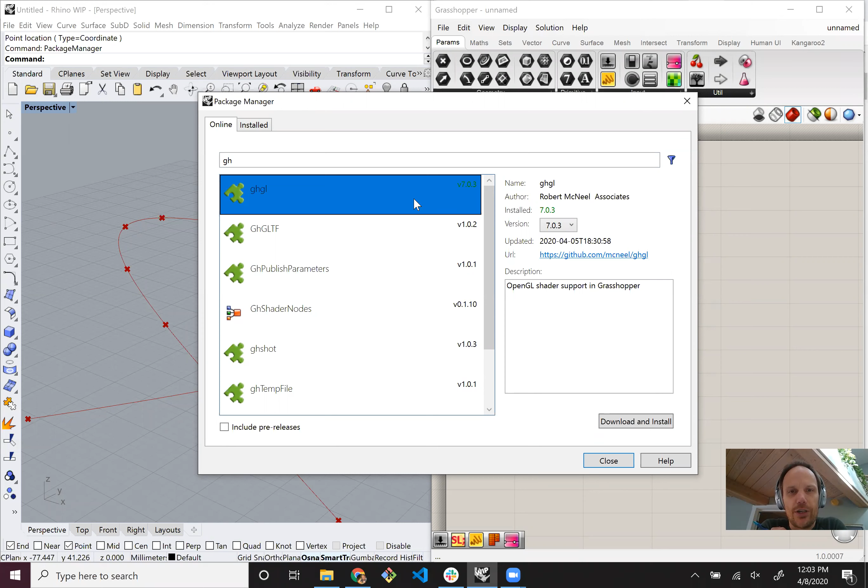I just wanted to point out, so again, we'll start out. GHGL is a component that's available through the package manager. If you're using Rhino 7, I would install the latest version, 7.0.3. If you're using Rhino 6, I believe 0.6.4 was the last version that really worked in Rhino 6, and there's still quite a few bugs in that version. So I would, if at all possible, just use the Rhino 7 version of this.

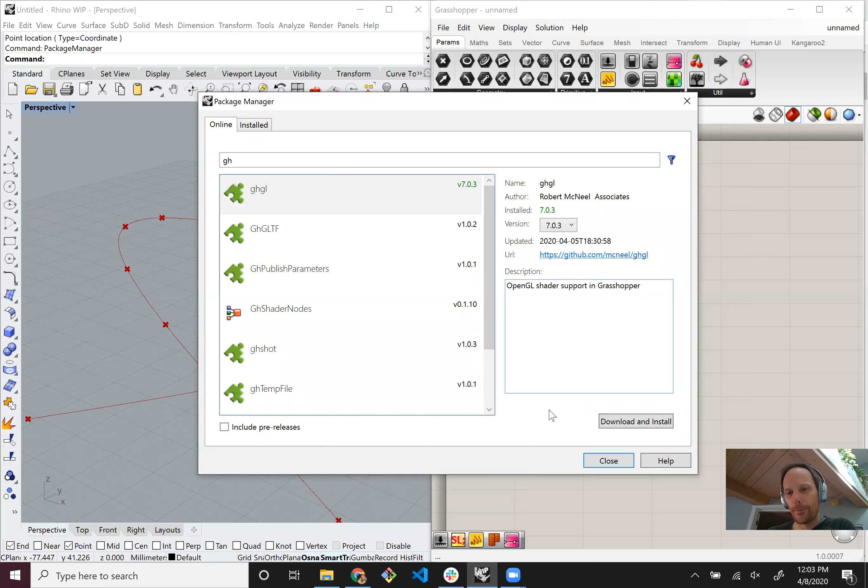All right. I think what I'll try to do is get a basic shader going, and then start tweaking it and show you guys some of the basic capabilities. There's so much involved here, and it can get pretty deep pretty quick, that I kind of want to just try to inform people about just the basics of what you can do.

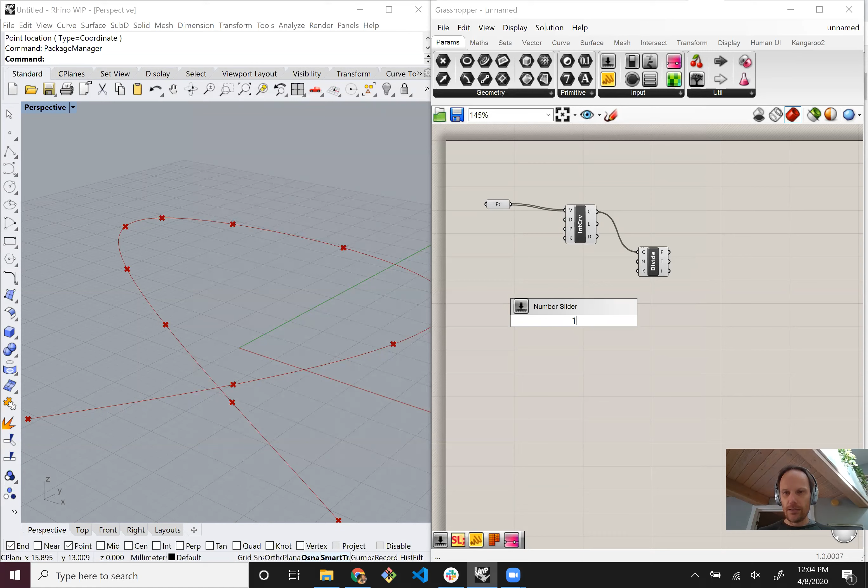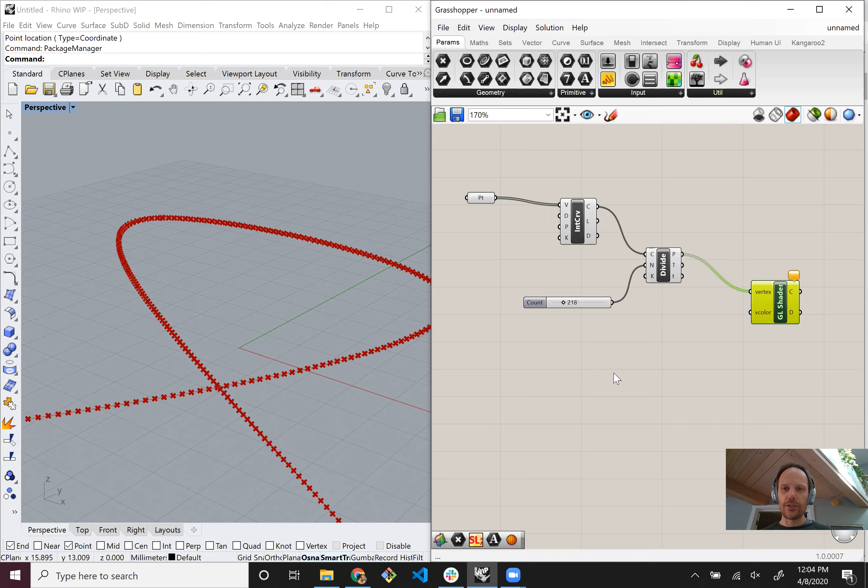So I'm going to make a curve. Well, I've already made a curve, and then I'm going to draw it in a bunch of custom different ways. So let's see, start with the slider, divide a curve, make some points, and make a GL shader. I'm going to feed those points into the GL shader. The default pre-canned GL shader is just one I wrote that currently takes vertices and a color or colors as input. So I'm just going to get color going here.

Feed that in. And then if I turn off preview for these guys, because they're right on top of each other, yeah, we can see that I'm actually feeding in information. This GL shader is doing the actual drawing in Rhino now, because the preview is off for these other guys.

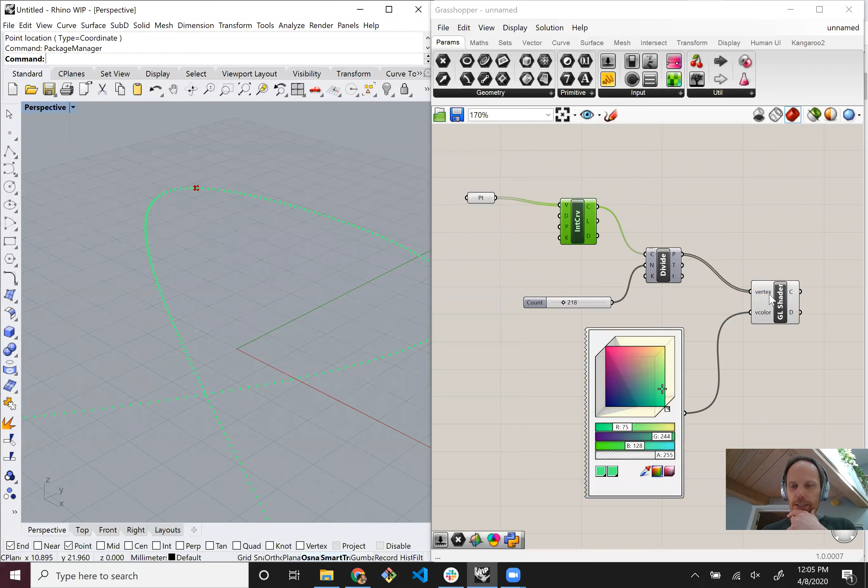So what's happening here is I've got this set up as a scripting style component where you can define different inputs that you want, and then those inputs would be interpreted by the shaders as either an array of inputs, and the shader would be interpreting each item in that array as a different pass through the shader, or as a single value that could be globally set across all the shaders.

And so if I go to edit code, well, actually, I think I'll back up here. If you right click on the shader itself, there's a few different ways that OpenGL can draw the inputs. Right now it's set up as points. So every single point that's being passed in is being drawn as an individual entity.

We could also draw them as lines, where every 2 points that get passed in are drawn as lines, or line loops and line strips, where the line strip in this case makes the most sense, where the point and its previous point get put together, and you make a continuous line out of that. So with lines, every 2 vertices would be interpreted as an individual line. Loop just connects the very last point and the first point; they'll come together. And strip is all these lines joined together.

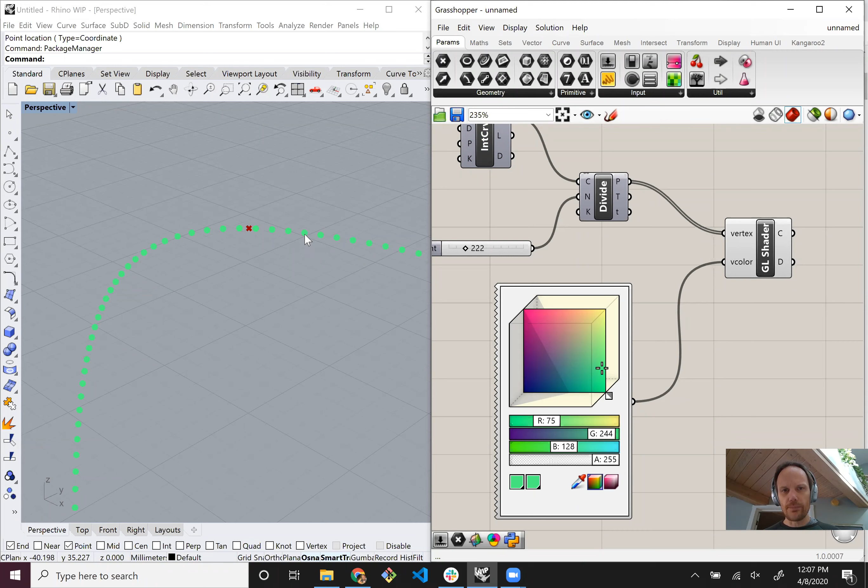So what's happening here, and I'm going to go to the shader itself now, is every single point that's being passed in is being run through this program, which is called the vertex shader. And the vertex shader takes every single point and manipulates it in a way that ends up being in a 1-by-1 clipping cube, you might say, and that information gets passed down.

Once it passes depth testing and whatnot, it gets passed down to a fragment shader. In this case, since our points are very large, the fragment shader is being called for every pixel that OpenGL thinks that point is supposed to be covering.

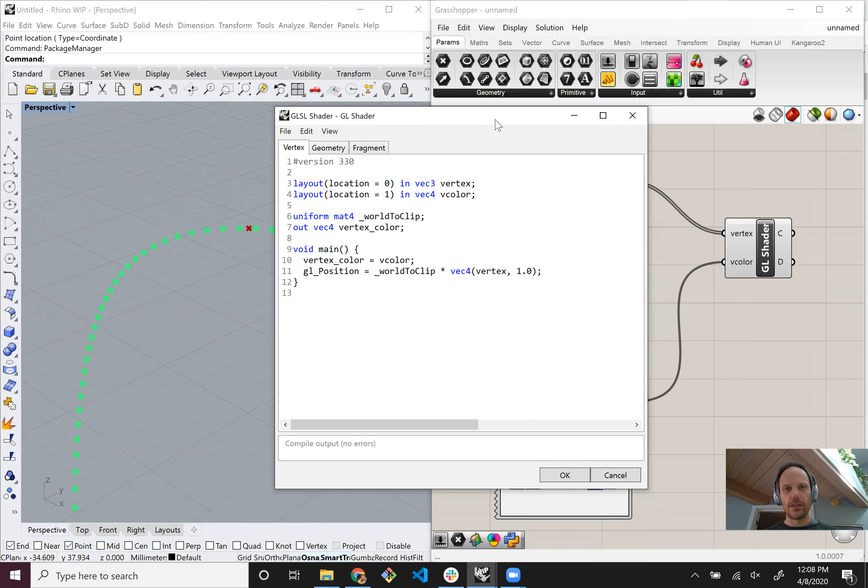And these are just little programs. So in this case, I've got vertex set as input, and I've got vColor set as input, and I'm using a built-in global variable, you might want to call it, which is a uniform, to convert this vertex from its 3D point position to a 4D point position. That's basically what you need to do inside of a vertex shader. If I go to the uniforms, there's actually quite a few built-in ones that I've got here already set up.

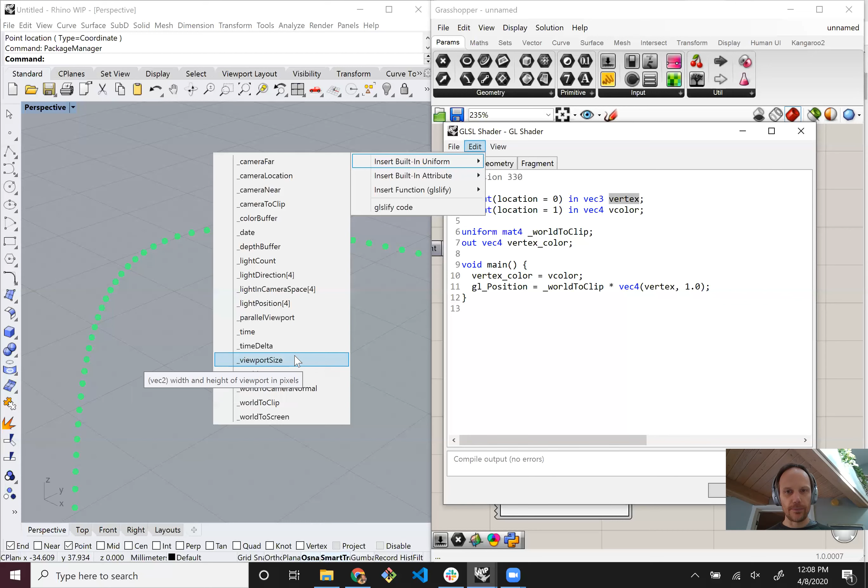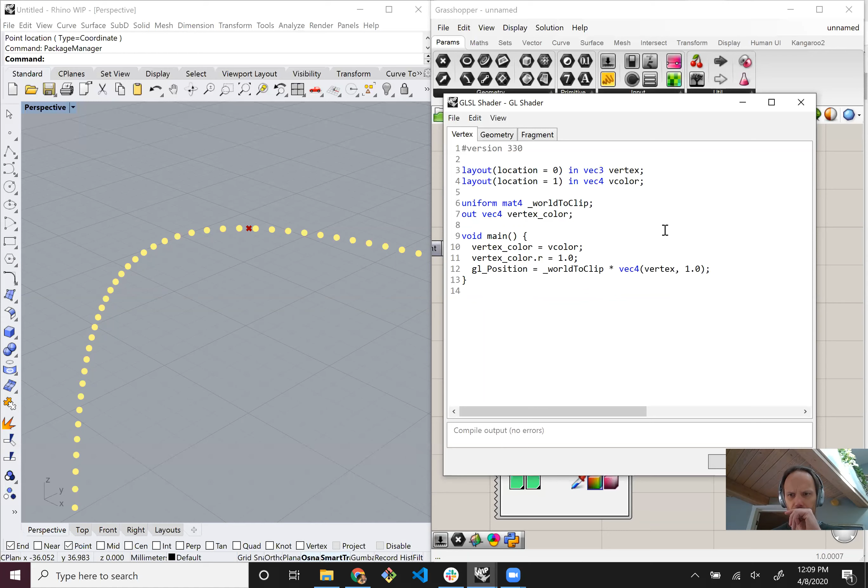So let's say we wanted to actually do something here. If I wanted to just take my colors, and I have the code editor set up now, so it actually compiles live on the fly, and I keep updating. So if I wanted to change my vertex color, dot R, so it's RGBA, equals 1. You can see that it's actually updating the color. And I could control that externally from Grasshopper.

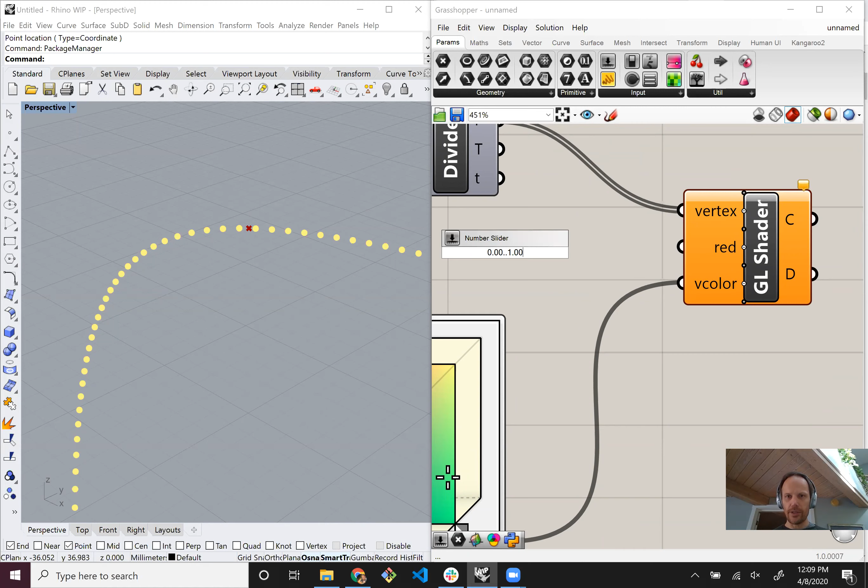So let's say I wanted to come back here, and I zoom in, and I add a variable, and I call it red, let's say, because I'm just being that creative. I hook up a slider to it, and I come back into the code, and there's a single input going for red. So now I have to actually say, all right, I know that I need a uniform as a single variable that's applied to all of the vertex shaders at this point, and it's of type float, and I'm going to call it red.

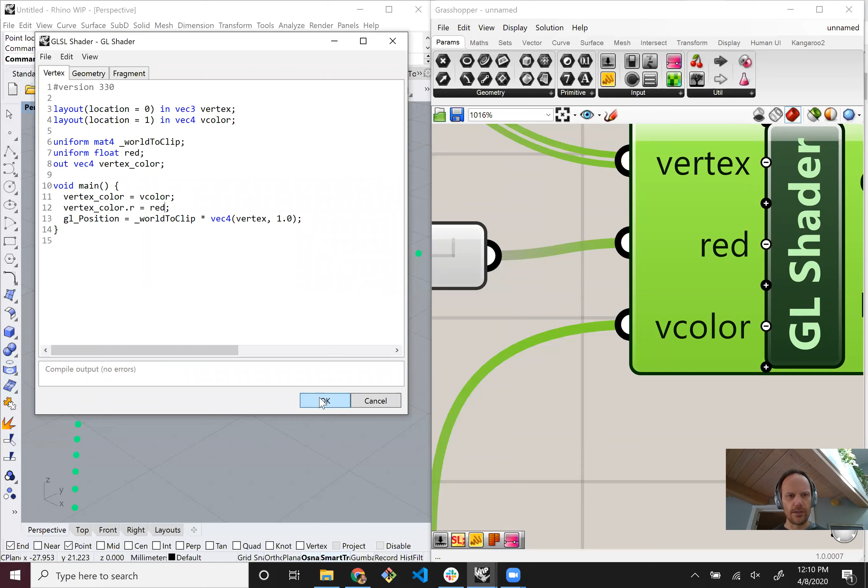So I need to match this with the name of a variable, and then here I'm going to change this to red and zoom back out, and didn't work. Oh, wait, no, it did. It's just because there's so much green involved there. You can see it changing.

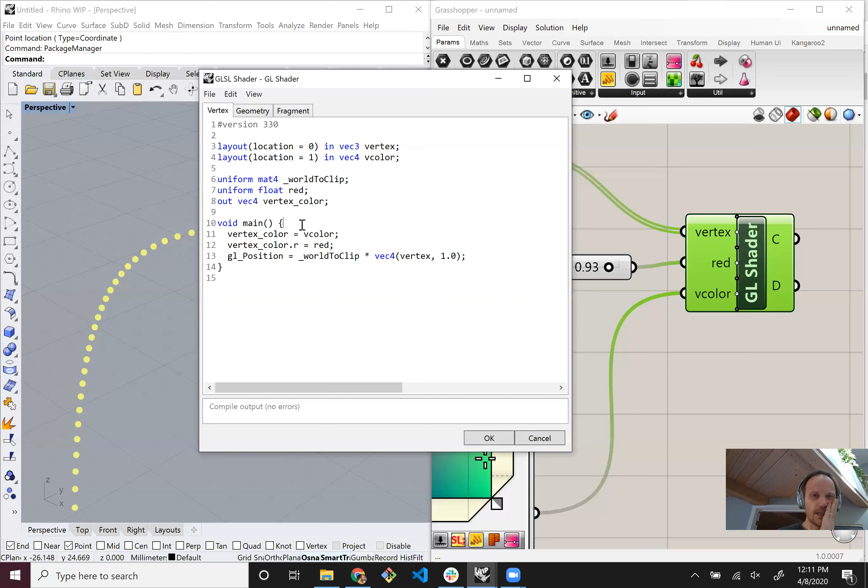What else can be done here? So since we're actually manipulating the, we're actually trying to draw custom stuff here on the screen. We can do whatever we want with all of these points. And we can say, all right, well, we know that we're passing it a vertex. We could say, let's see what these vertices look like here, actually, in XY.

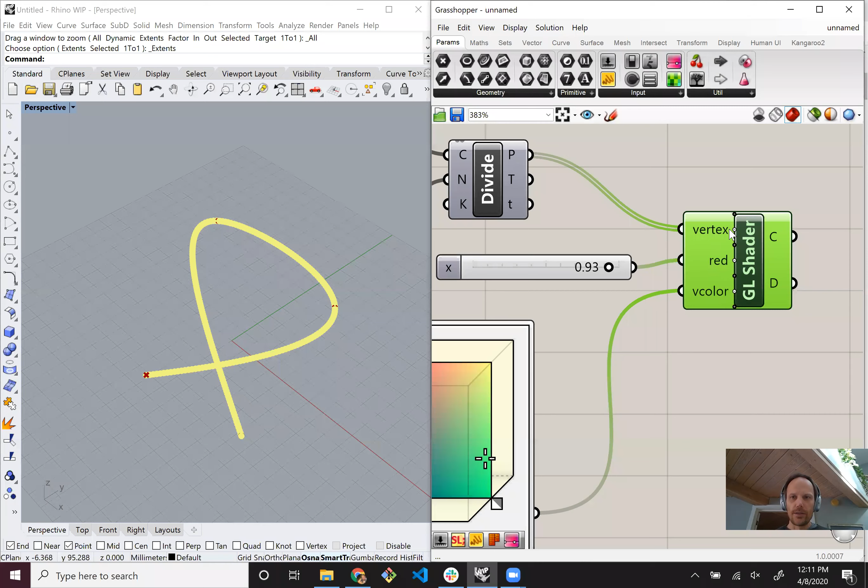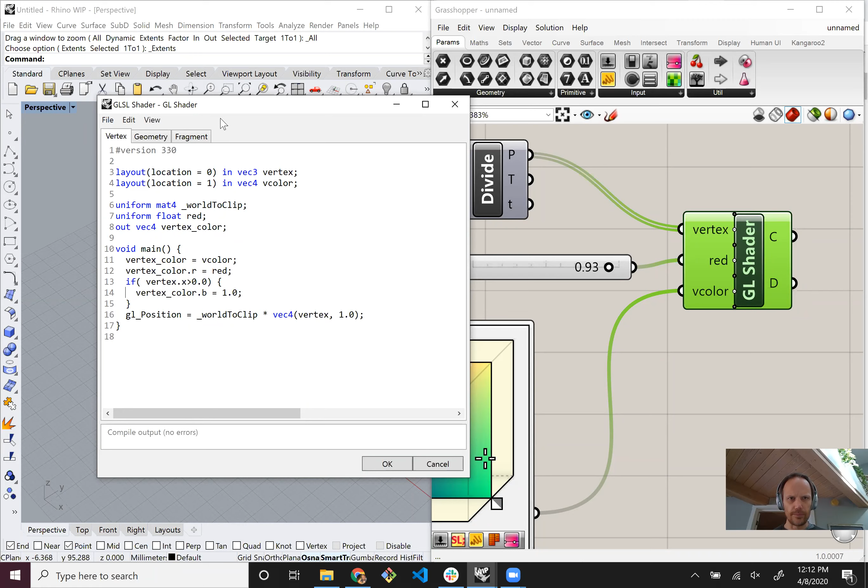Okay, so we got some on the plus side of the X and some on the minus side of the X. So I could use this vertex input, and I could say vertex color B equals 1, but only if vertex.x is greater than 0. Right. So I just ramped up the blue value when you're on one side of the x-axis. So that's interesting.

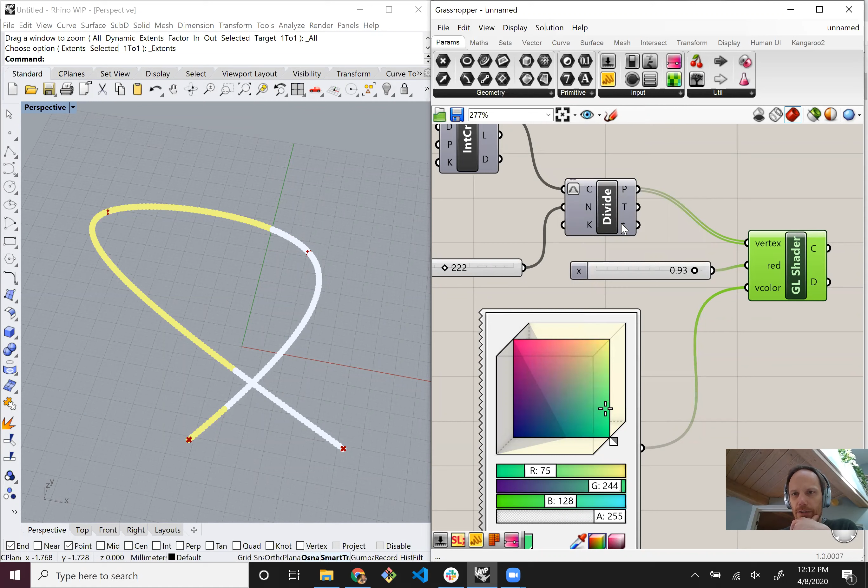Okay. Well, let's take the curve. We'll re-parameterize it so we get a value from 0 to 1, and I'm going to feed these t values in here. So t, pass that in, go into the shader, and this syntax looks a little weird. It could actually just be in float curve T, but GHGL needs to be tuned up a little bit to be able to detect that.

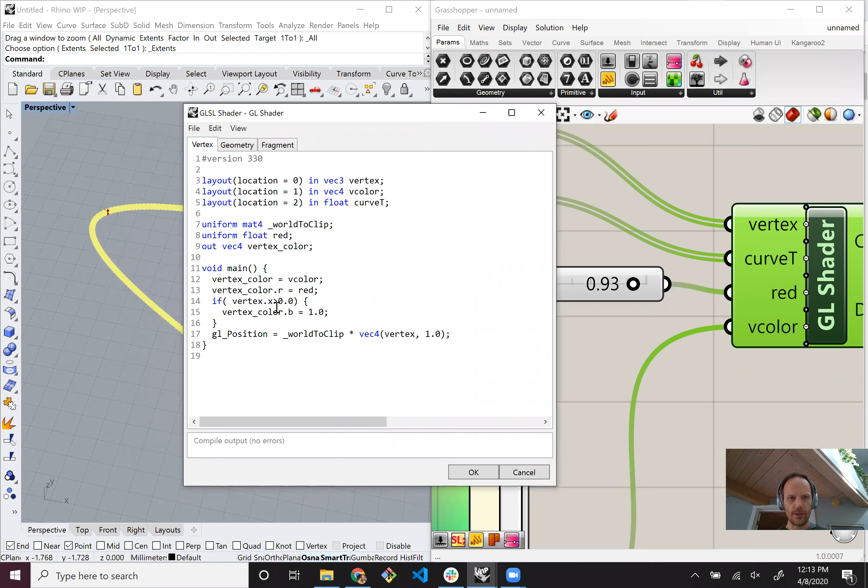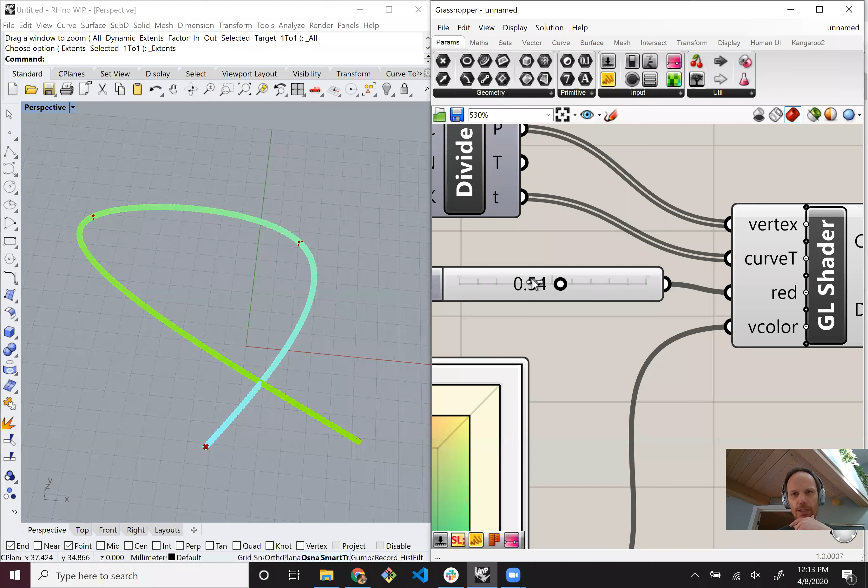Okay, and so now I could say vertex color dot B equals curve T. We'll just get rid of this stuff. Probably have to hit F5 to restart it. And you can see that as it's traveling from 0 to 1, the color is actually changing based on the curve's T. And again, it might even look better if you actually did it as a line strip. So you have a nice gradiently changing curve based on its parameter value.

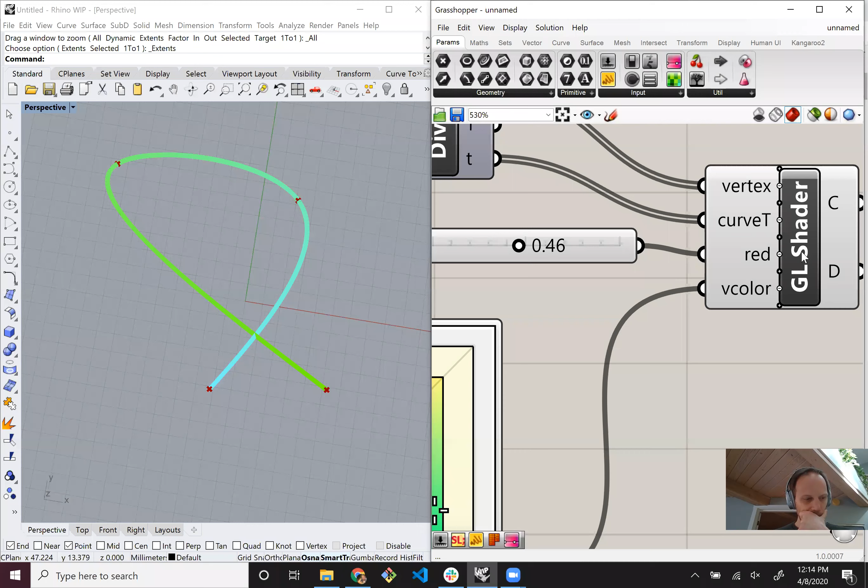Okay, so let's see where I'm at here. A little scattered after the Zoom bombing thing. So,

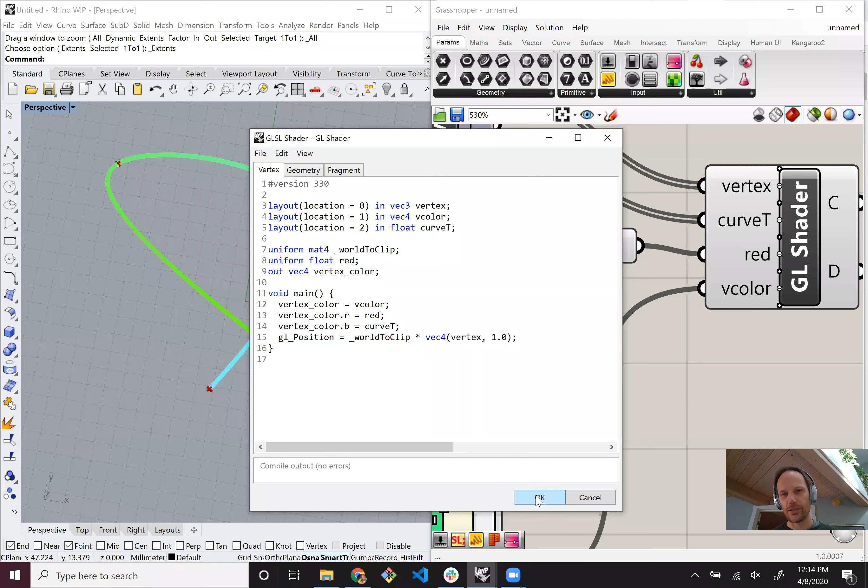what I was going to try to get to was having a really interesting looking point or curve with a bunch of different changes made inside the shader itself. So I'm going to go back, change it to points, and I can see that I'm drawing individual points here. And I set up an equation for changing my color right here. I'm just going to look up what I did here before. So I'm going to have some value, and I'm going to use the sine function.

So there's a lot of different built-in functions in GLSL. So sine, cosine, absolute value. An easy way to look that stuff up is just GLSL, and then, in this case, mod or sine. Usually takes me to it right away, all these reference pages. And those are all supported right inside of GHGL itself, because we're really just compiling shaders on the fly and then sending them down to the graphics card.

Let's do sine of some big number, and we'll multiply it by curve T, so we get something that's changing. And we want the color to be in the range from 0 to 1. Sine goes from -1 to 1, so we'll do +1, and then divide it by 2, right, times 0.5.

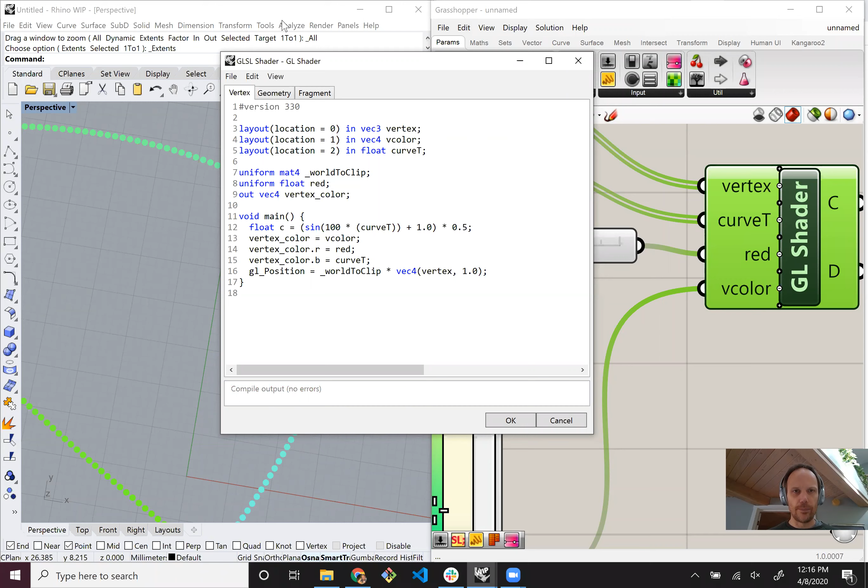And you can see that while I was typing, it was blank. If I have a typo also, it should actually show up down here and tell me that I made a mistake on the fly. I basically am looking at keystrokes, and if you haven't typed for more than a second or something like that, I try to recompile on the fly and redraw.

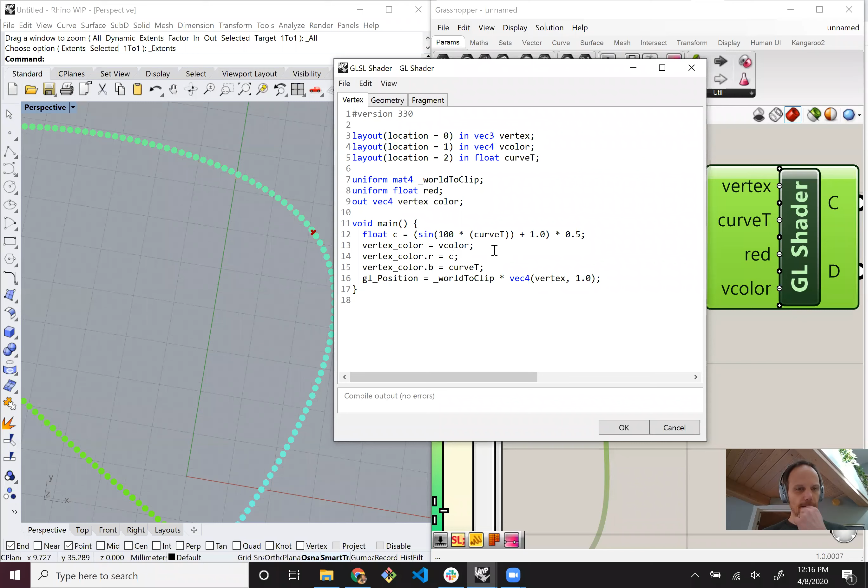So let's see, this color, we'll make that C. And so now we're getting some kind of a repeating effect, right? Because there's sine and there's a large number. And actually, instead of using this number, I think I'm going to change this. So let's get rid of this slider, make a new one. Rename this guy to repeat.

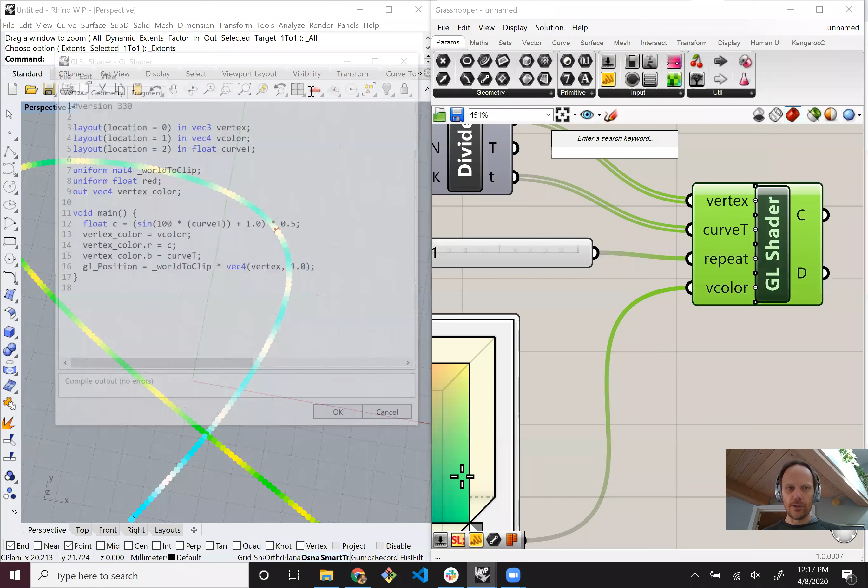Go back to the code and change red to repeat. Change this value to repeat. I think I deleted red earlier, so everything should be fine. Sometimes I have to hit F5 when I actually make changes. And so now you can see that the repeat is basically because the sine function is there.

What other cool stuff can you do with this? Since there's built-in uniforms for all these different things that could be happening. Let's see. There is one for time, and there's time delta, but time is every time the frame is drawn, you get an updated number. So you can do animations basically while this is running.

So I'm going to go to my uniforms section here, and I'm going to insert time. And then let's see, I'll adjust my equation here. So I have plus underscore time. All the built-in ones that I've made, I prefix with an underscore so that autocomplete works and you can kind of tell which are the built-in items.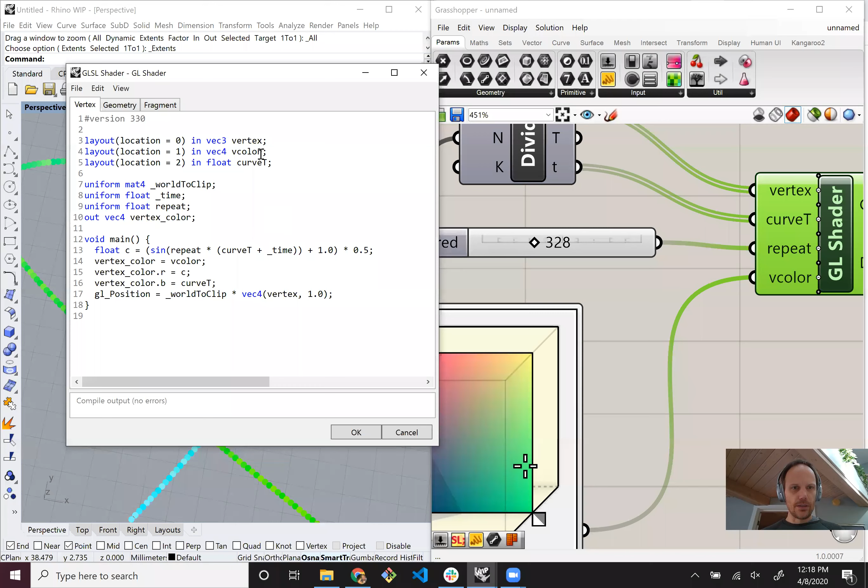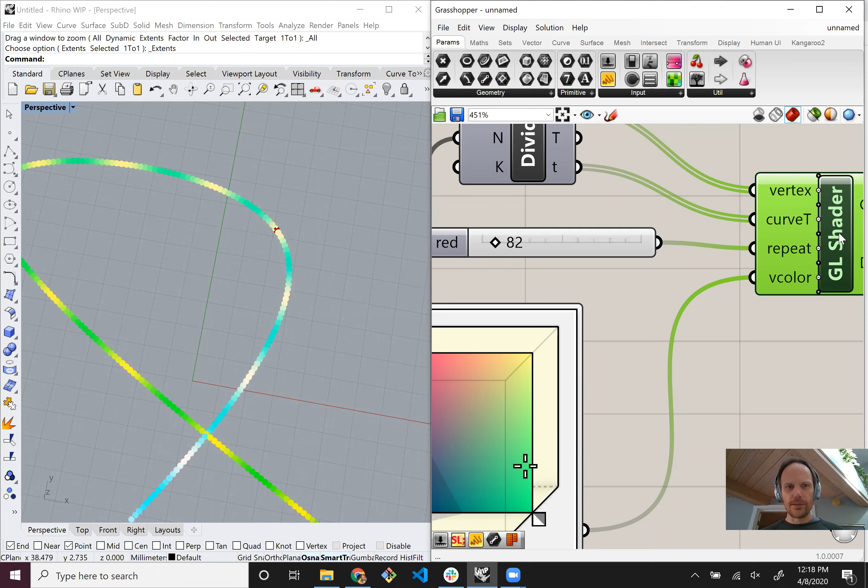Let's see. Is that actually making a difference? Oh, it is. Yeah. It's a little bit hectic. So I'll just take time and I'll multiply it by some number to slow it down. There we go.

Okay, so the vertex shader is being called over and over and over. Well, sorry, Rhino's repainting over and over and over again. And every time it repaints, the vertex shader itself is getting called. And as time gets updated, it's just adjusting colors on the fly.

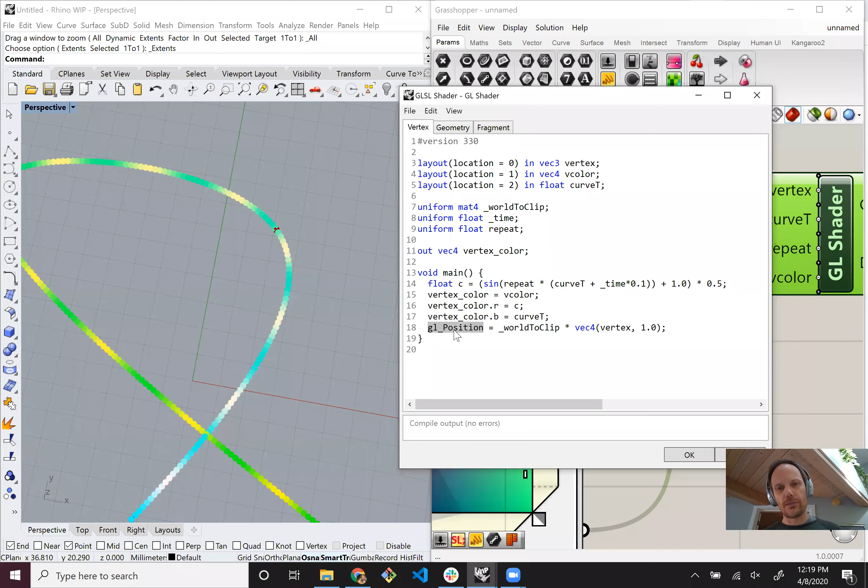Let's see, and what did I end up with here? So what I'm doing here in the vertex shader is I'm figuring out a color and I'm figuring out a position. I don't really need to figure out the color here. The color is something I'm actually passing down to the fragment shader. This is the output. So by default, a vertex shader always passes out a position. But you can define as many outputs as you want from the vertex shader that get passed down to a fragment shader.

And so I think I'll make another output here. I'm going to make one out vec3. So these different data types, vec3, vec4, vec2, and float are usually what you would work with. That's a single float, 2 floats, 3 floats, 4 floats, and then a mat4, I believe, is the 4x4 matrix. Those are typically the common data types that you would use. Vec4 is used for color also, so RGBA.

In this case, I just want to take a vertex and I want to pass this vertex down to the fragment shader. So I'm going to name it something like FS vertex, just to mean that I'm going to pass this down to a fragment shader. And I've declared it as an output. So I'm just going to say FS vertex equals vertex.

And then if I go to my fragment shader, I don't have any input set yet for the fragment shader for the vertex, so I'm going to just define a new one. I'll say in vec3, give it the exact same name, FS vertex. And now this vertex value is being passed down from the vertex shader to the fragment shader, and that means that every single pixel that the fragment shader is running at, it's getting the vertex.

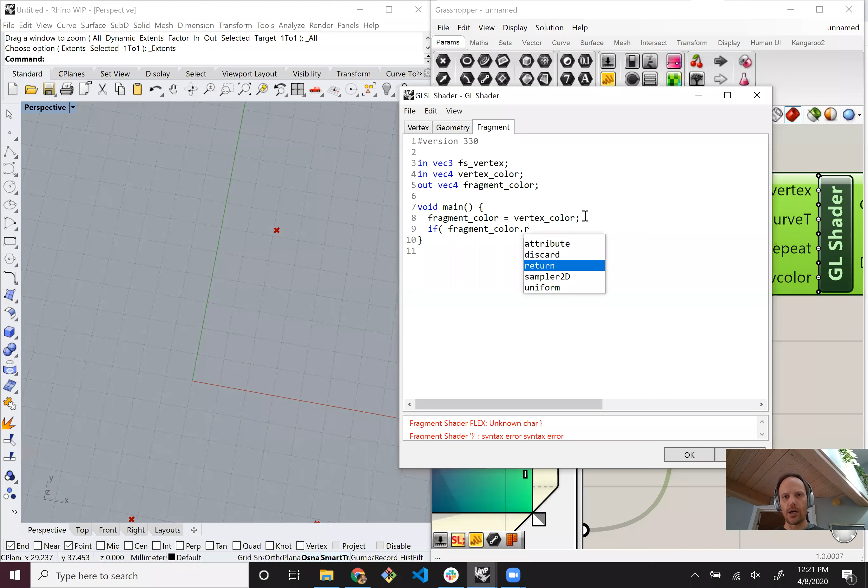So what can we do with that actually? Well, here the fragment shader is actually figuring out what the color is that should be drawn. And so we could say if fragment color dot R is greater than 0.5, then we're just going to throw away those pixels.

Right. So now we get pixels being thrown away based on their color. What I'm going to try to do here is I'm going to turn off time because it's a little annoying. Just make that 0, so it's always the same spot.

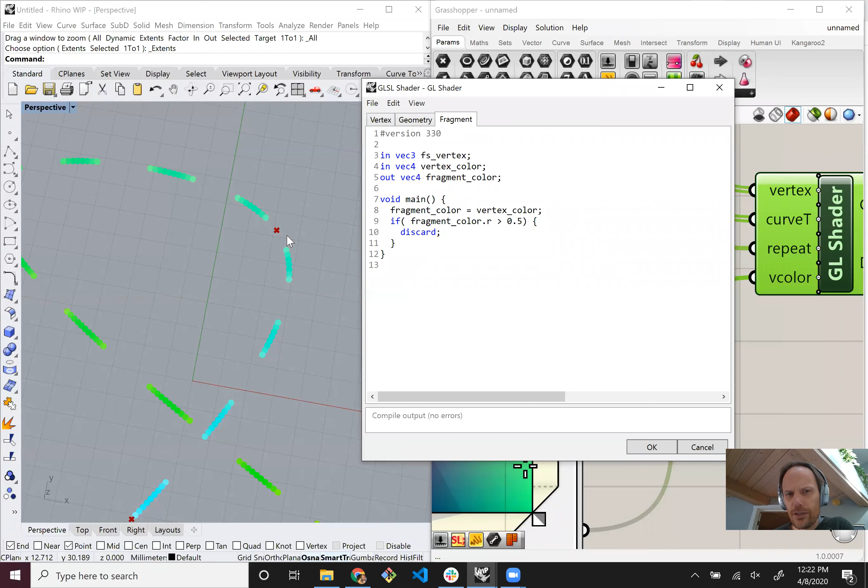What I'm going to try to do here is, since we're drawing these points, I'm going to get rid of the center, so they're nice circles, and maybe even put a little dot in the middle. Let's see. Turn my count down so you can see the individual points a little better.

And to do that, now that I've passed the actual vertex down, the 3D vertex down, I can figure out where the center of that specific vertex is in relationship to where this pixel is being drawn. In order to do that, I added a few functions to GHGL that are kind of easy to use helper functions. And to get to those, you go to Edit, Insert Function.

And so I've got clip to screen and screen to clip, closest line. This basically finds a t value along the line. I can talk about that later. And then a world to screen. So convert 3D world coordinate to a 2D screen coordinate. So I'm going to insert that.

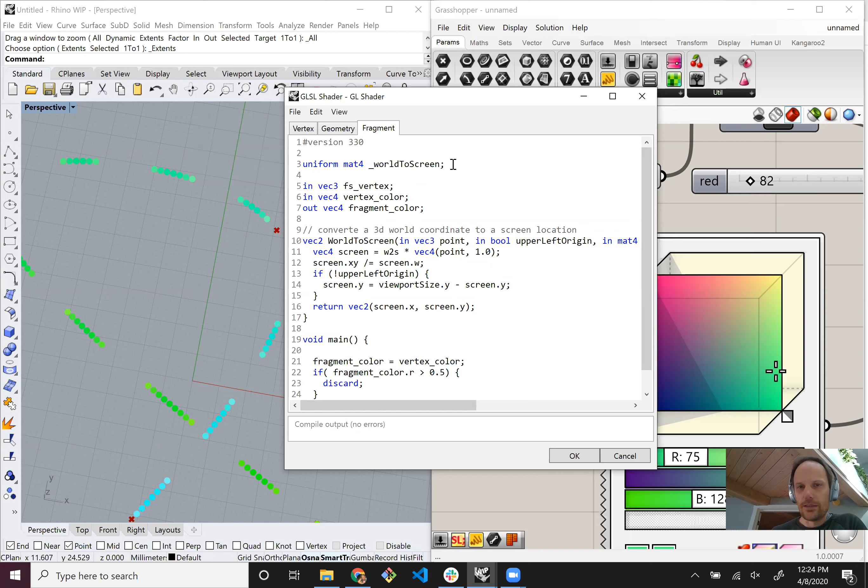Now the world to screen and the viewport size are actually built-in uniforms that I've got. So if I go to uniforms, let's see, I was looking for world to screen, add that, and uniform for viewport size. So now I can actually figure out that I want to get a screen coordinate.

So I'm going to vec2 screen equals world to screen. The fragment shader vertex that I'm being passed in. Upper left or lower left. I want lower left because I'm going to use this to compare against a built-in OpenGL variable that tells you where your pixel fragment is.

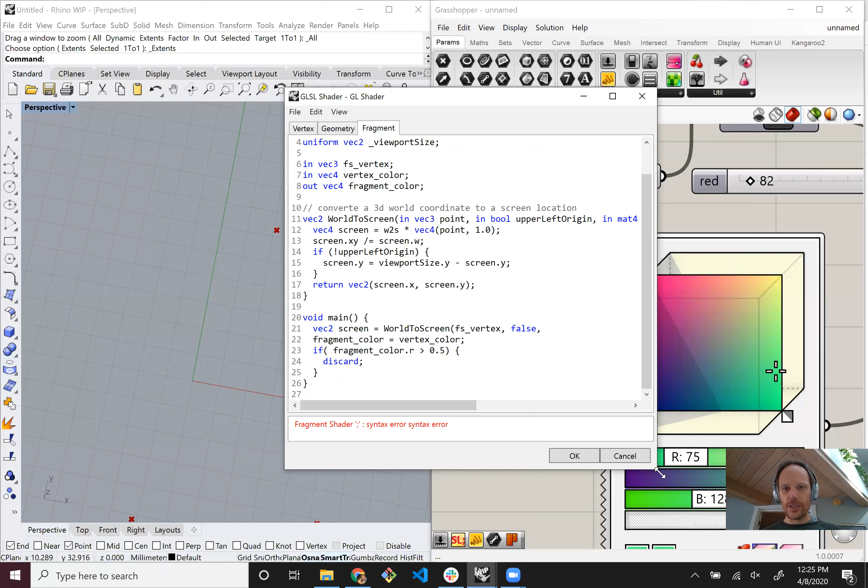Let's see, world to screen transformation. So that's this guy. And viewport size. So now I have a screen coordinate. And OpenGL has, at the fragment shader level, something that's called the gl_FragCoord, which tells you exactly where on the screen that pixel is that's being drawn.

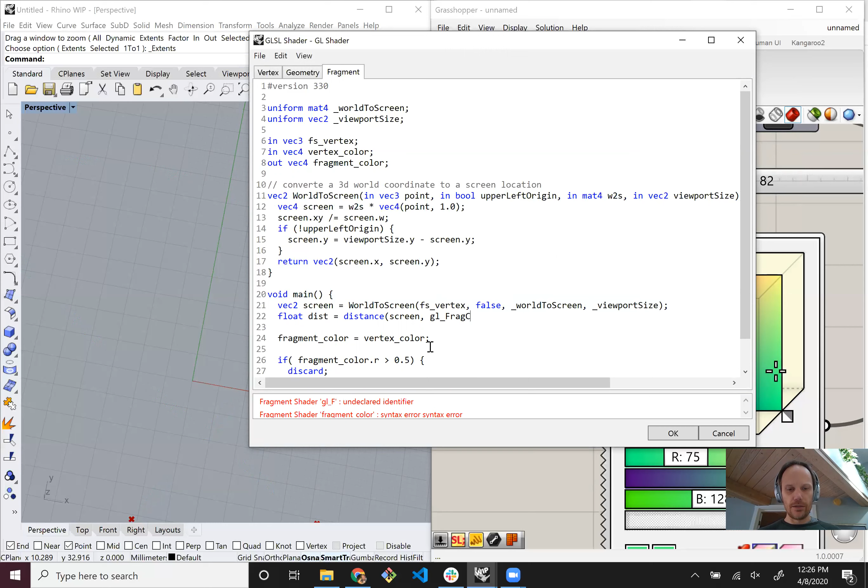So what I can do is I can add a little function here that says I'm going to get a distance. I'm going to use the distance function in OpenGL, which is going to get the distance between two 2D points, 2D locations. So I'll get the screen point that I just figured out, and there's this built-in gl_FragCoord, and I just want its XY values.

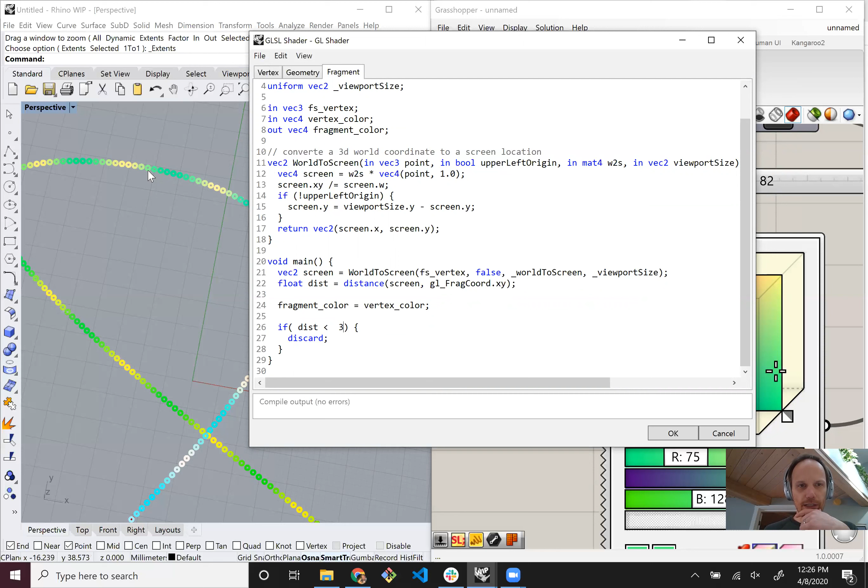And now I can say if that distance is less than some number, say 3, we can discard, and you can see I'm actually getting little holes taken out of the center of the pixel. And we could hook this up to a slider too. So might as well do it.

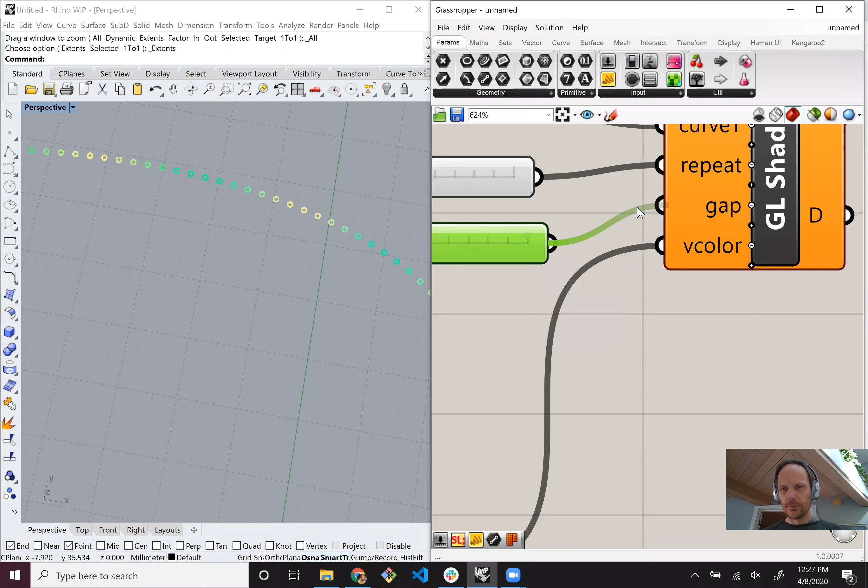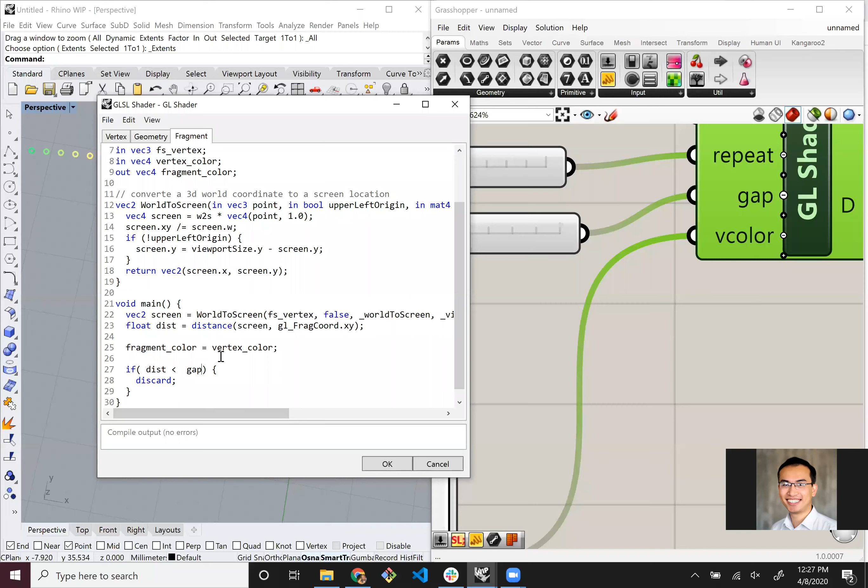And for the distance now, I'm going to say if the distance is less than gap, I'm going to throw that pixel away. So if we come over here now, you can see that I can actually start making holes. And you can do other cool stuff too, right?

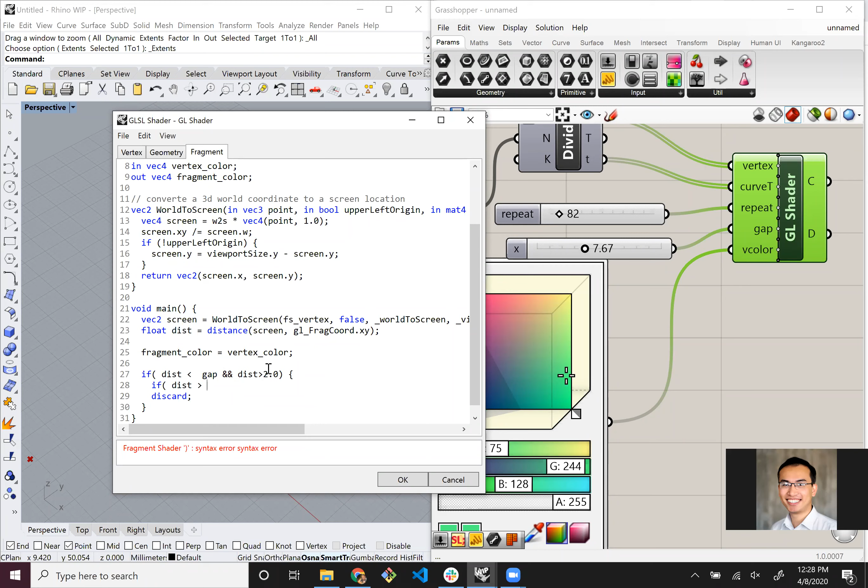So if it's less than the gap, but if the distance is greater than, let's say it was less than gap and distance is greater than 2, then we'll discard. So that'll actually leave a little dot in the middle, right? Yeah. And we can change the color too.

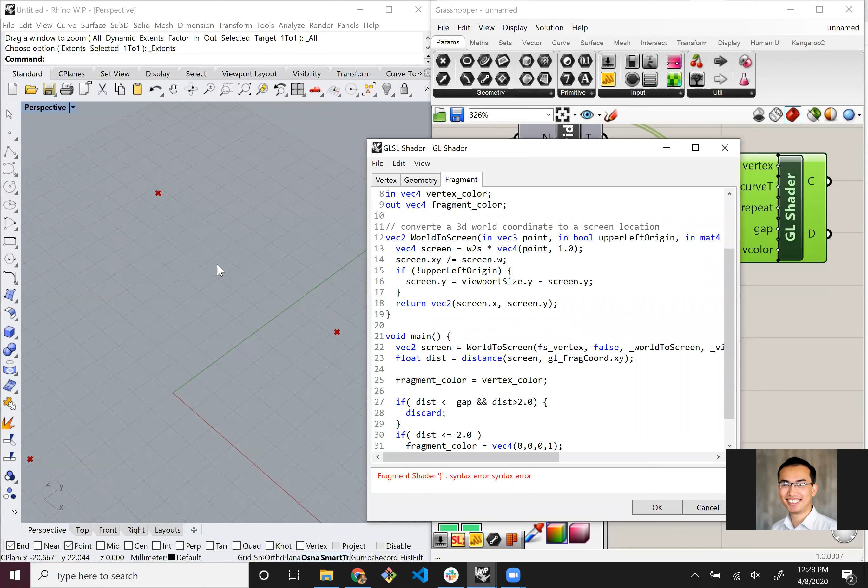Say if the distance is less than or equal to 2, then my fragment color is black. Right, so we get nice little black centers there. And let's see. Let me turn time back on now that we've made it a little less annoying.

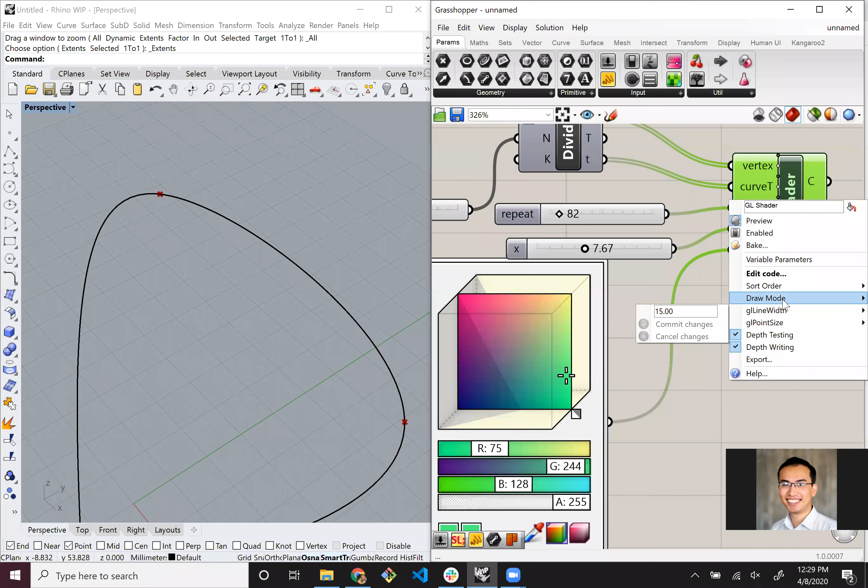Change the draw mode to line strip. And for line strip, I think the line width is already 15. Draw mode's line strip, 15. Oh, there we go. So if I make the line nice and wide, it's got the same effect, right?

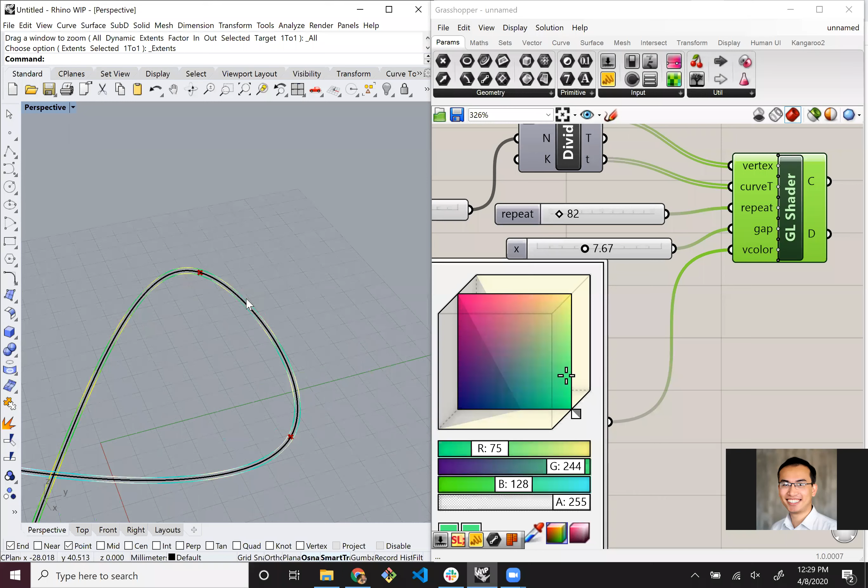You could do other things along here too. As you're moving along T, you could make little dashes on the center and stuff like that, if we want to just discard pixels as we move along.

Pretty cool. So any questions so far?

One question, if I can jump in, Steve. How's the performance if you scale this up? Is it comparable to native if you're working with dots and points inside Grasshopper? Because this is just affecting, from what I understand, the pixels on the screen.

Yeah, so this is going to be a lot faster. When you change the inputs, a solve has to occur inside of Grasshopper, and so that's just going to be standard Grasshopper speed for actually solving.

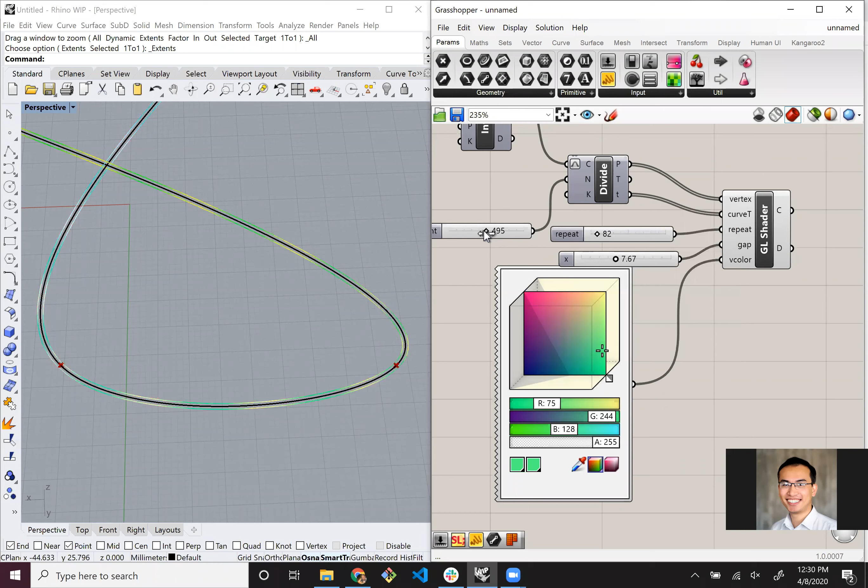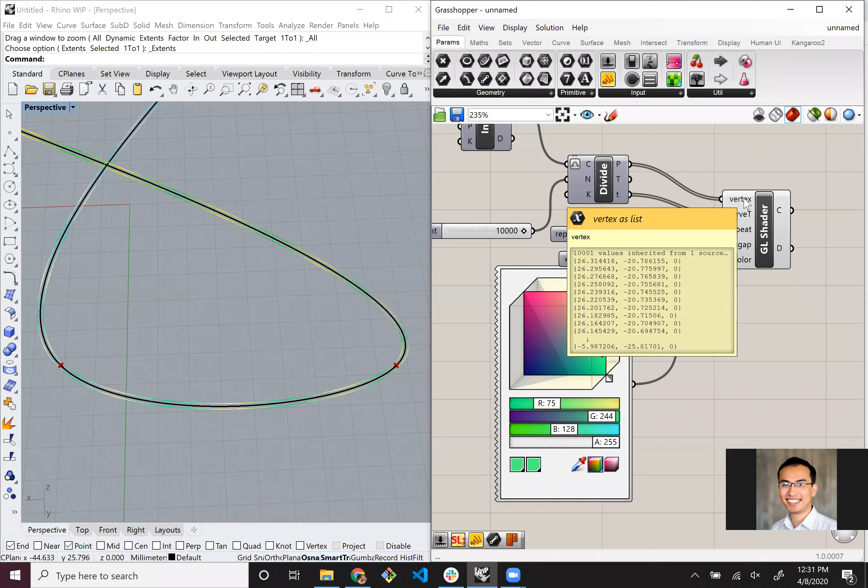But once I get, say, 1,000 - let's change these values, say 10,000 - once I get these values, I actually just upload all those values to the card, and if they don't change, I don't do anything. I just keep calling the GPU with that same set of data over and over again. So it's actually quite fast.

All right. So there you go. It's still moving along. My computer is set at 60 frames per second VSync here, so that's basically as fast as it can get right now. Does that make sense?

Yeah, and I have to add that I think it looks amazing. There's so many possibilities popping up in the brain when watching this. There's a lot that can be done here, and I'm trying to keep it relatively simple at this point.

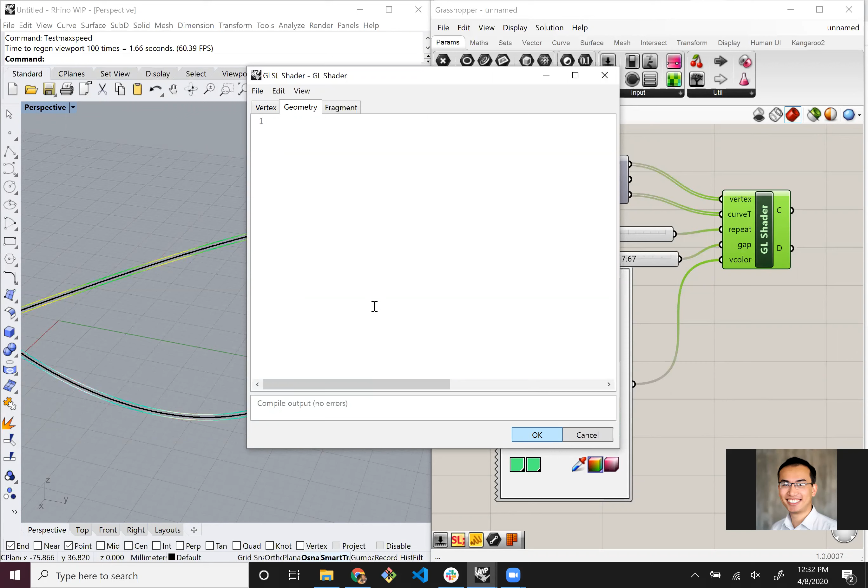Because I completely glossed over another tab here called the geometry shader. I have nothing here, but basically a vertex shader can pass data down to a geometry shader, and then a geometry shader can actually add more vertices. That's how we do things like sprites, and we can start making the lines have variable width, or variable size points, maybe arrayed across the surface or something like that. So it's deep, it's geeky, but it works really well.

This is actually what I've been using to get the display to work in Rhino itself. It's a great prototyping tool.

The other nice part about it is since it's all self-contained, you can just share it with other people, and that component will just work.

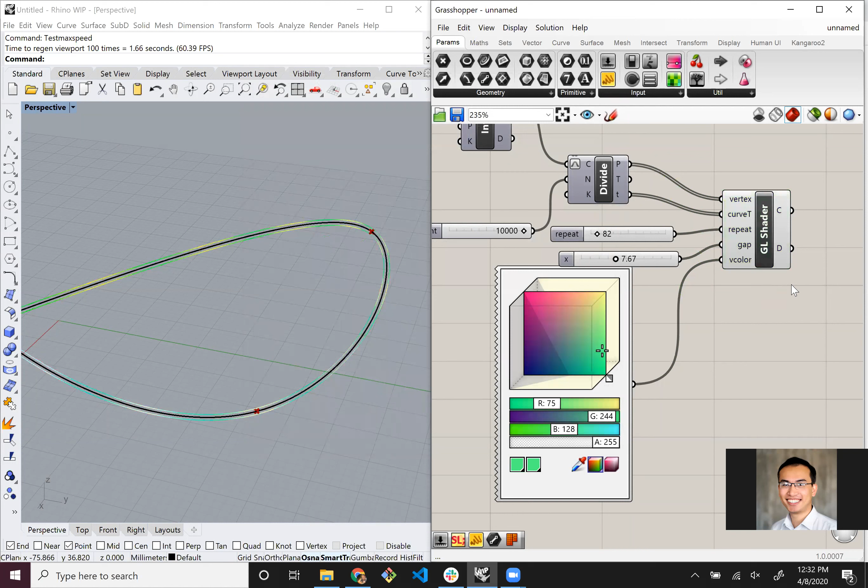Do you expose some global stuff like the background bitmap or the environment map, just in case we want to do something like refraction, for example? Can we get access to that global information?

We don't, but we can definitely add as much as you want. Basically right when Rhino's done drawing its main geometry, it calls this, and so we could add background color or anything like that.

I don't know if you've seen these tooltip previews showing up on the screen. Those are the depth and color buffers that can be passed down further to other shader components as texture inputs. So you can start doing really fancy post-processing effects and stuff.

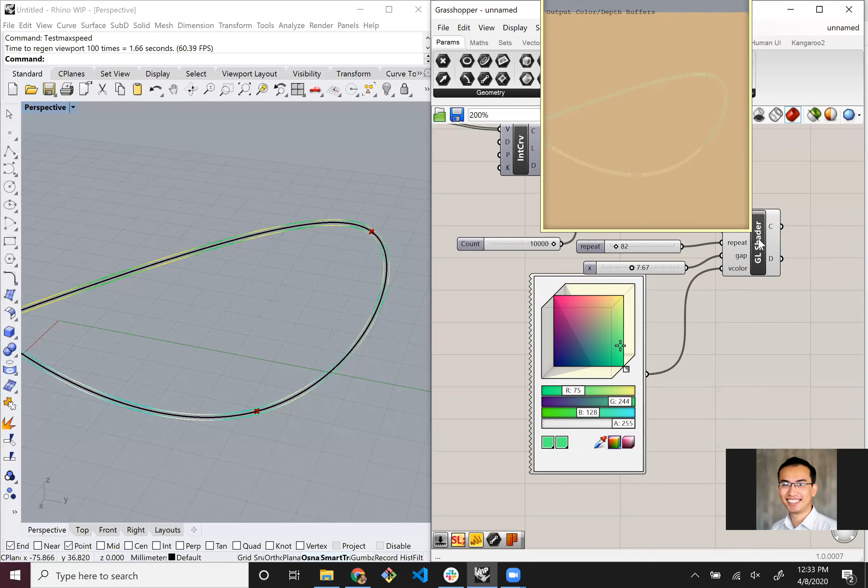That makes sense. So it's actually possible to have a shader that applies to the entire 2D screen with the depth information and the normal information for post-processing, right? So if you want to do my own version of screen space ambient occlusion, it should be possible, right? I should have all of the normal and the depth information there.

Okay, yeah, and I would recommend - probably what I would recommend is get the open source GitHub repository, which is GHGL. And in there, I have a directory called samples, which has a few samples.

Really, the spot to look is deep inside sources tests. This is just - I haven't really documented them well enough. But if we go in and we start opening, let's see.

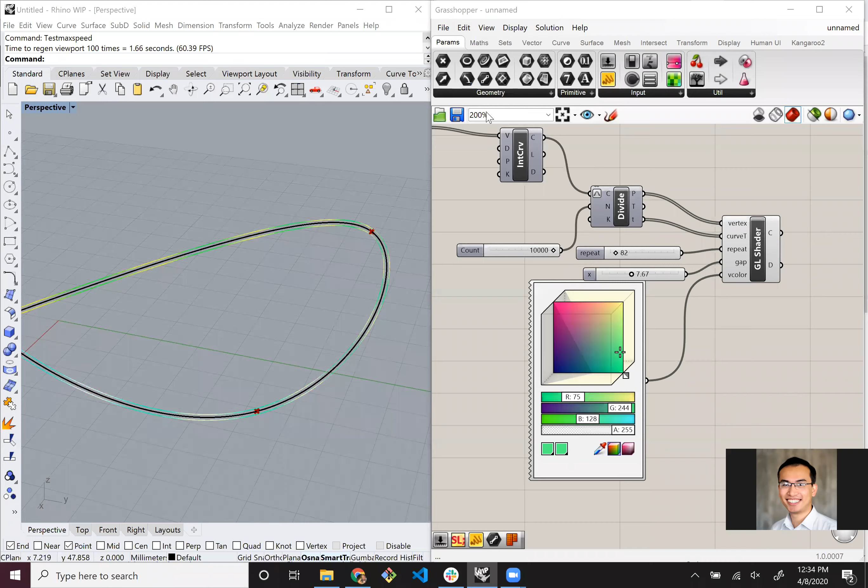So GitHub, GHGL. Well, if I go to samples first, I think I've got post effects in there already. Yeah, so we could do - let's do pixelate, let's say.

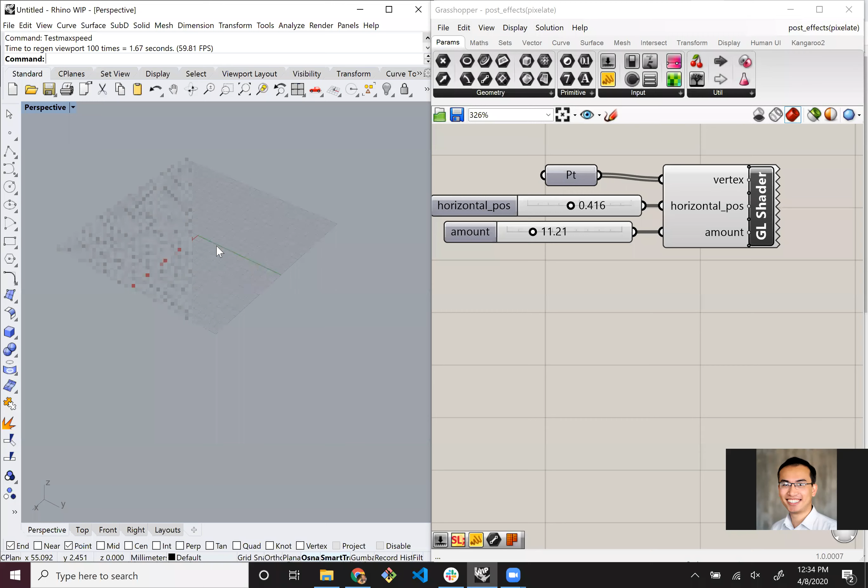Oops, I'm hitting test max speed. I make a sphere. If I want to do post-processing of the entire screen, then I will have to generate a fake geometry that covers the entire viewport, right?

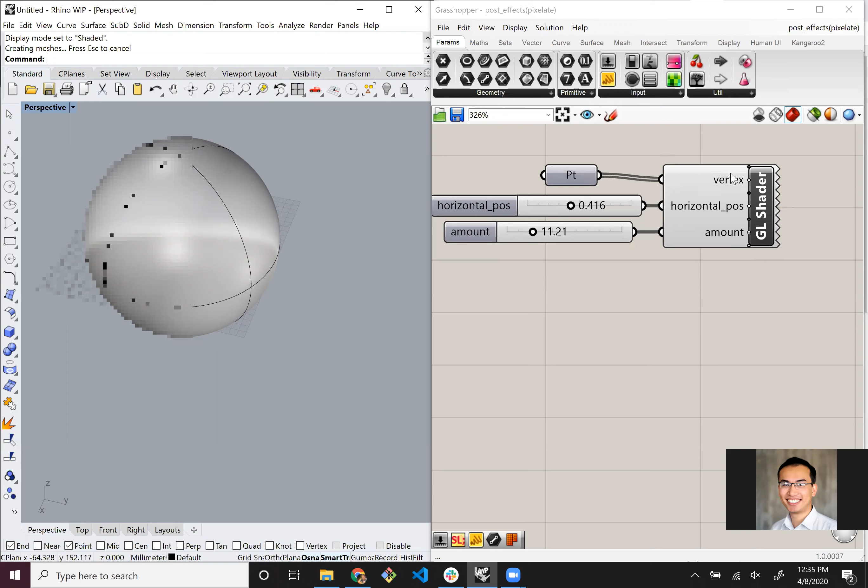Right, so here I'm actually doing that. This one is - I'm probably just making a decision. The fragment shader.

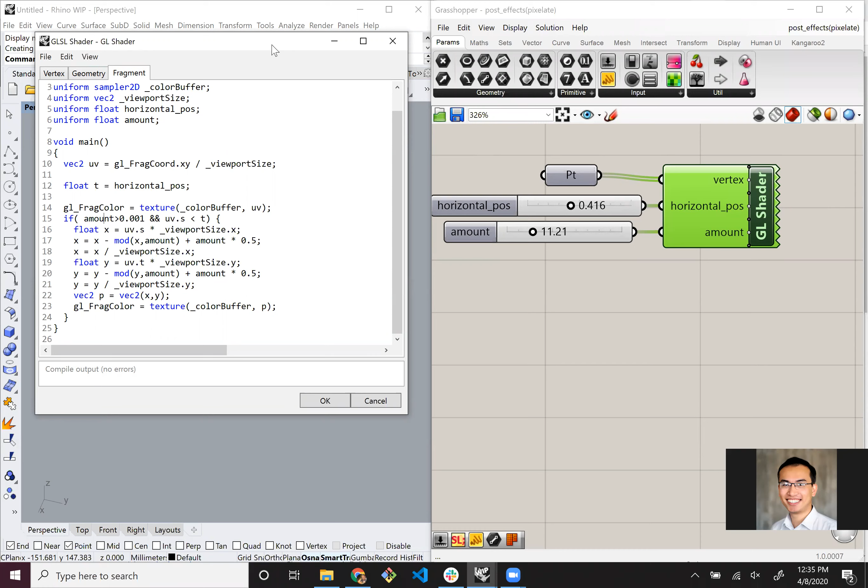T is the horizontal position. Yeah, I'm splitting it somehow. Not seeing it offhand, but I can actually show another one that's probably a better effect.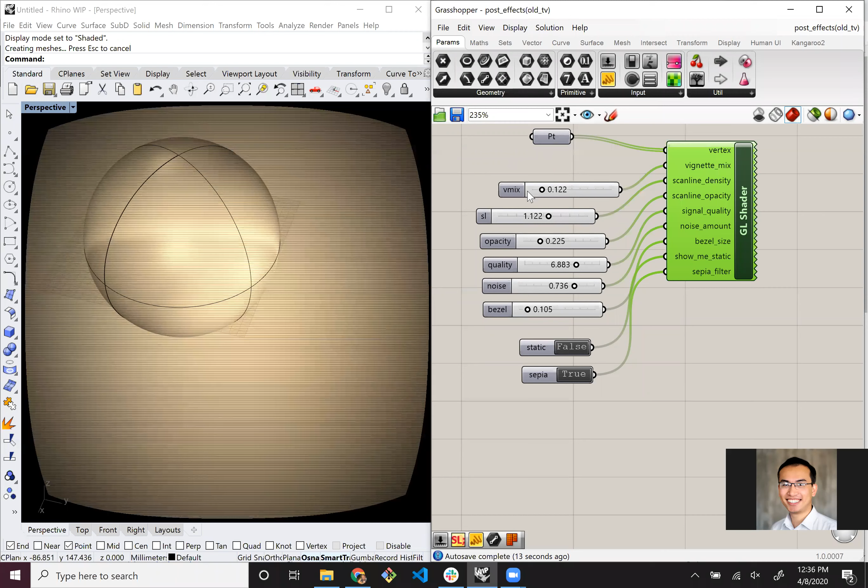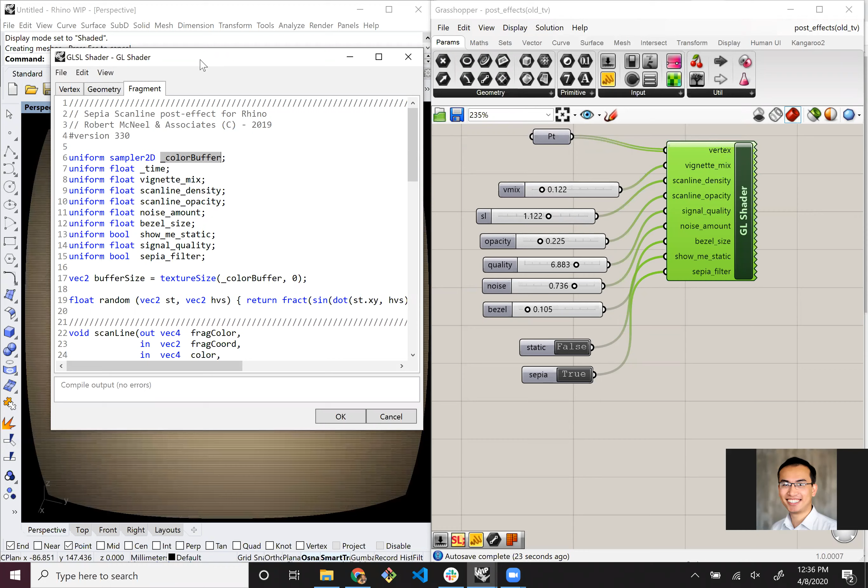Well, this is a fun one. So here we're actually passing in -1, -1, and a quad that's getting mapped to the entire screen. Then inside of the shader itself, I'm getting the color buffer, which is everything that's drawn up to the point where the shader has kicked in, and then I'm using that as a texture and applying effects on top of it.

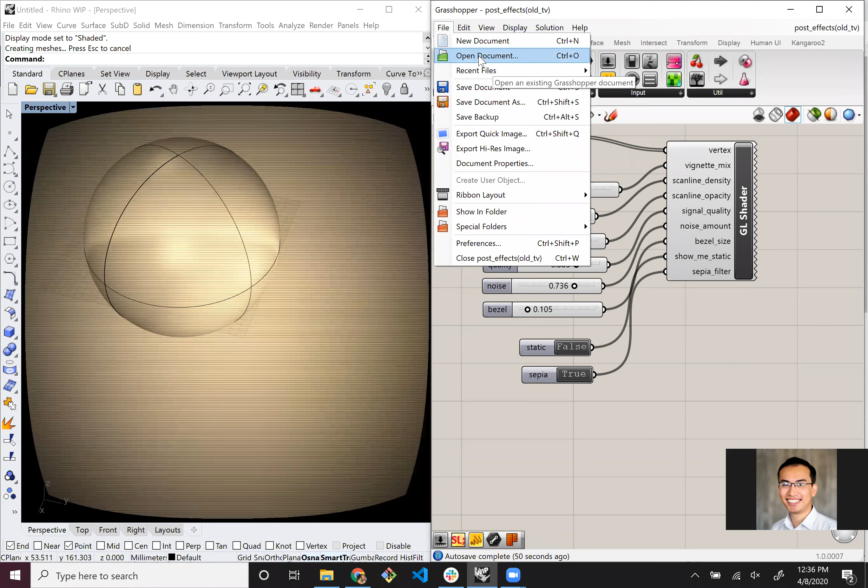Right. And if you have multiple situations like that, then they will use the sorting order to know which one comes last, right? Right, I try to figure out the correct sort order for when these shaders are chained together, but it's really hard to do it just right. So there is a sort order in there.

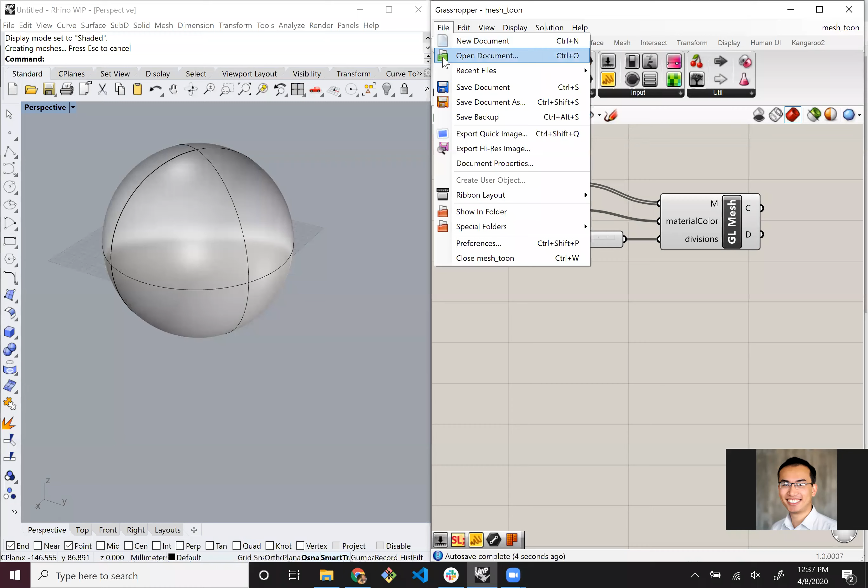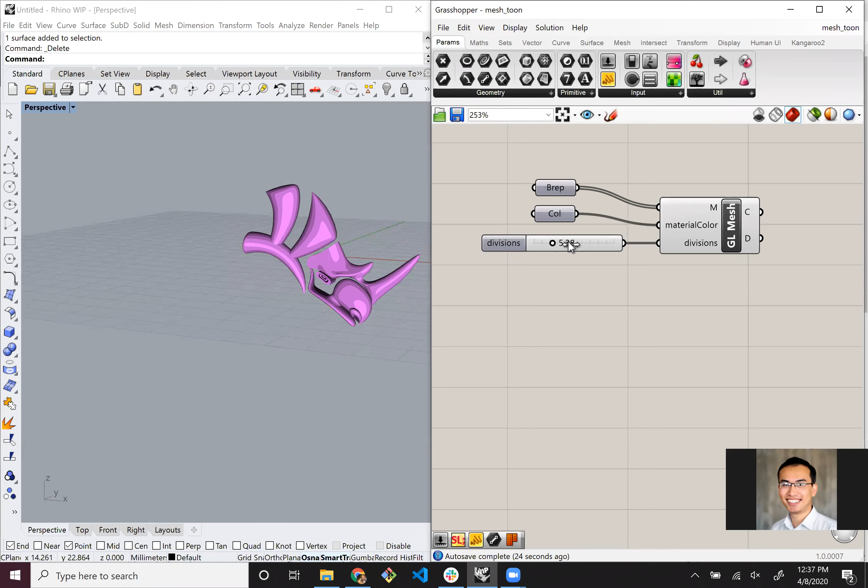Let's see, I can actually show the source and the tests. Some nice simple tests are in here, and some get kind of complicated, but probably people like toon effects. Let's see, what did I just do there? Open. Oh, it's much smaller, that's why. So if you wanted to see how toon shading is done, all these are in the test, and if you look at the shaders, they're actually quite small.

In this case, this is one of the mesh shaders. It takes a mesh as input, and there are some built-in attributes to say do you want the mesh vertex, do you want the mesh normal. What are the others here - texture coordinate or the vertex color. In this case, I need the normal. I take that normal and pass it down to the fragment shader.

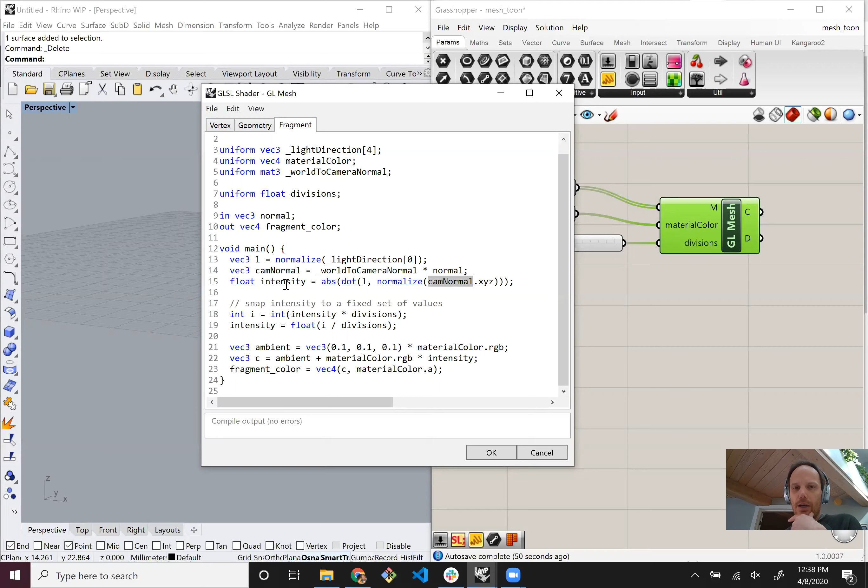And in the fragment shader, there's a built-in uniform that says what are the lights in the world to camera transformation. I basically take the normal of the mesh vertex and convert that to camera coordinates, because I know that this light is actually in camera coordinates. And I figure out how bright a pixel should be based on the normal and the camera direction.

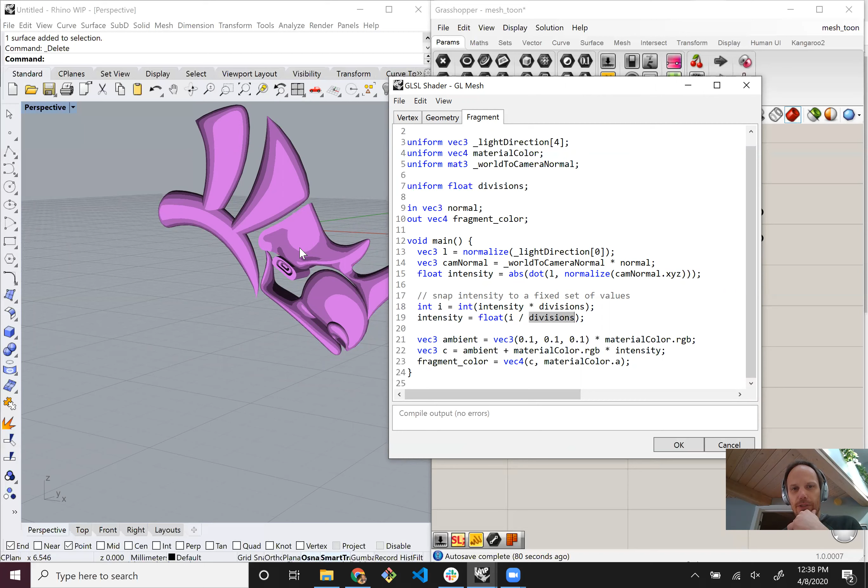And then in this case, I think I could just comment these two out, and this is basically standard shading. All I'm doing here is kind of banding the shading by multiplying, converting to an int, and then dividing back out. So I converted these numbers into hard bands, let's say.

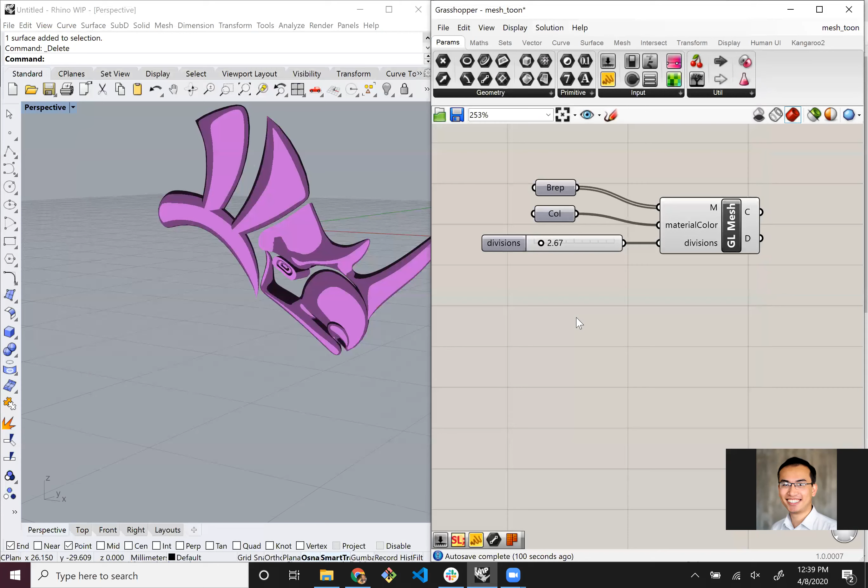Right. What else? Okay, just want to confirm that the entire rendering pipeline in Rhino is based on forward rendering, right? There's no deferred rendering here. That's correct, that's correct. For this, that's true.

There's deferred - I mean, deferred rendering, you mean draw to a bitmap and then use that bitmap for other stuff, right? Yeah, like do all the bitmap and do the lighting as the final step rather than compute the lighting in the fragment shader. Right, so some of our stuff is deferred rendering, and some is just regular forward rendering, depending on the display mode you're in.

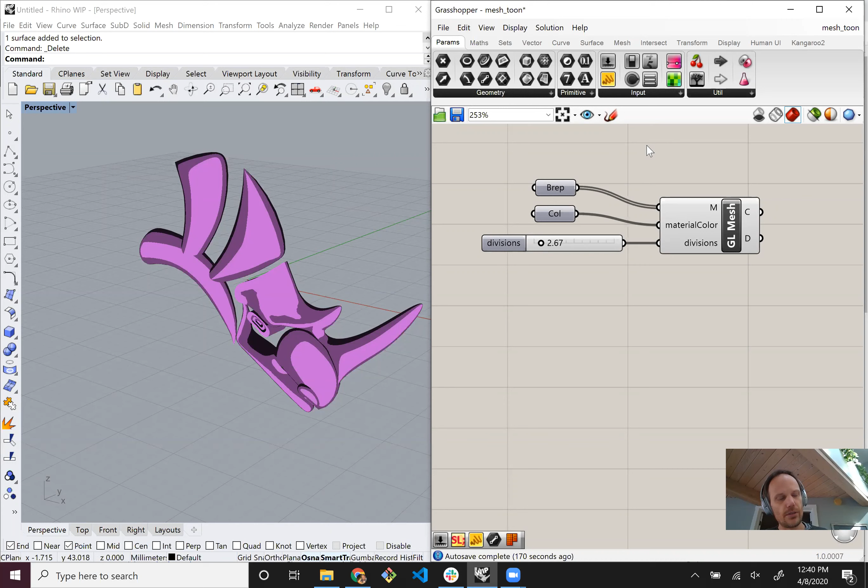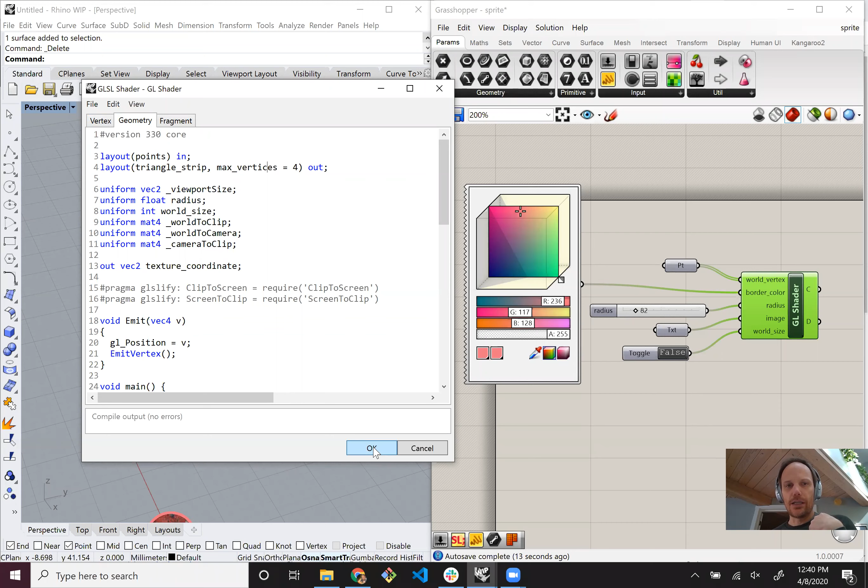So let's see, here's a sprite sample. I think something like this would actually be useful, because this is using geometry shaders to draw these circles. I've got a single point that I'm passing in, but then I'm expanding those points out into quads, and then I'm texturing those quads also. If you have a string that gets passed in to the shader, and that file is in the same directory as the Grasshopper definition, then I can pick up on what that image is that you want to use.